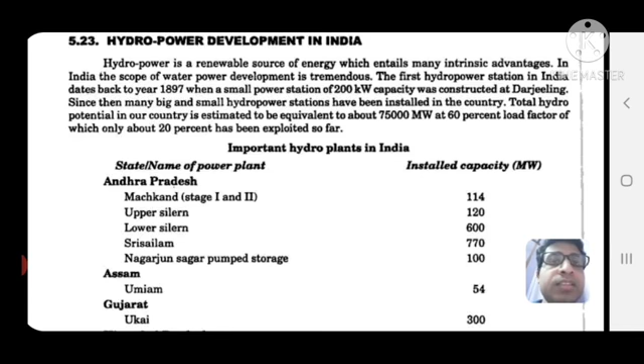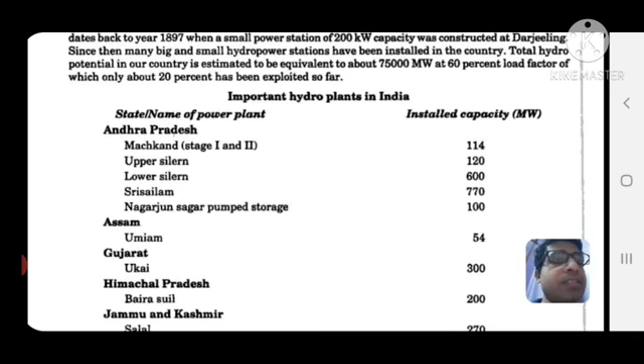The first hydropower station in India dates back to 1897, when a small power station of 200 kilowatt capacity was constructed at Darjeeling. Since then, many big and small hydropower stations have been installed in the country. Total hydro potential in our country is estimated to be equivalent to about 75,000 megawatt at 60% load factor, of which only about 20% has been exploited so far.

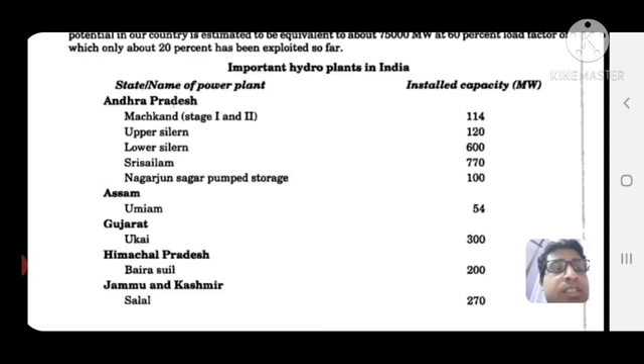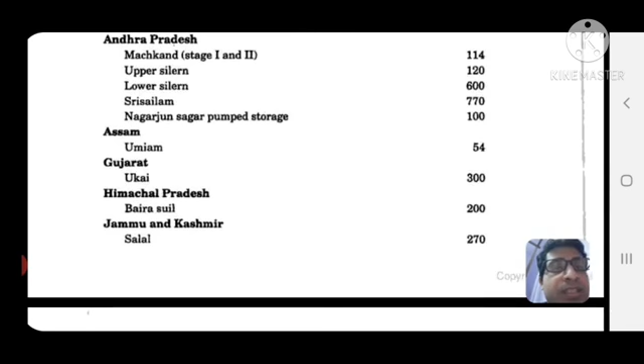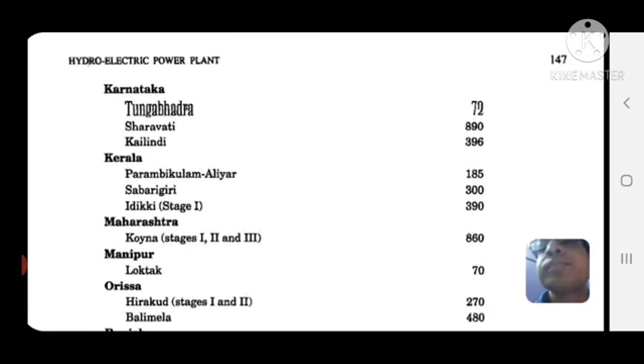State name and power plant installed capacity: Andhra Pradesh, Machkund and Upper Sileru, install capacity 114-120. Assam 54. Gujarat, Ukai, 300. Himachal Pradesh, Bairasiul, 200. Jammu and Kashmir, 270. Karnataka, Tungabhadra, 72. Manipur 70, Odisha 270, and Tamil Nadu, Uttar Pradesh, Rajasthan, one by one.

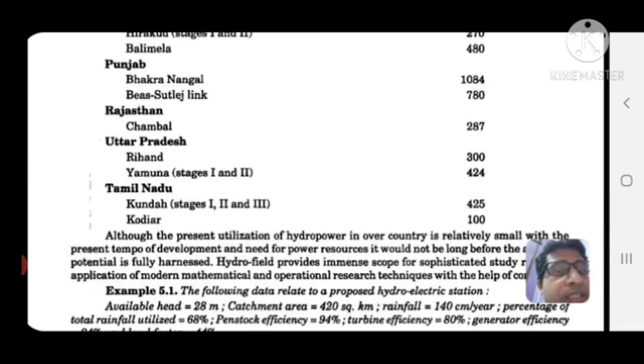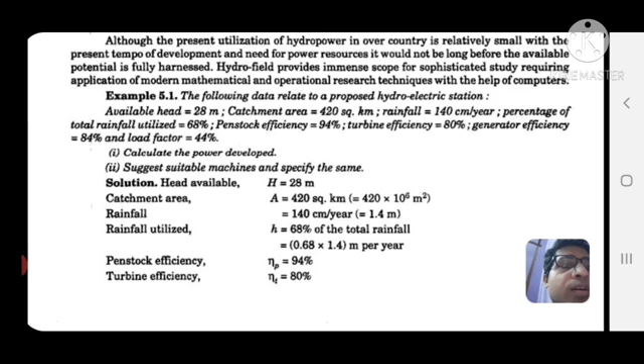Although the present utilization of hydropower in our country is relatively small, with the present tempo of development and need for power resources, it would not be long before the available potential is fully harnessed. Hydrofield provides immense scope for sophisticated study requiring application of modern mathematical and operational research techniques with the help of computers.

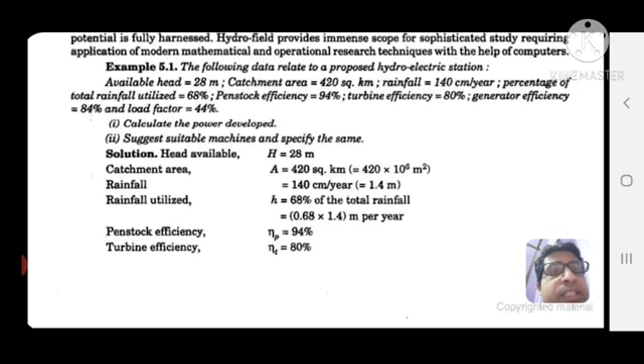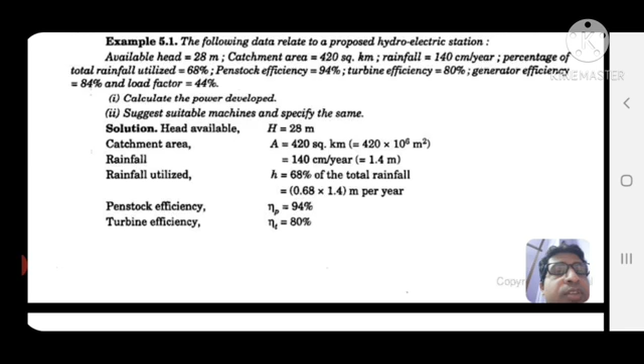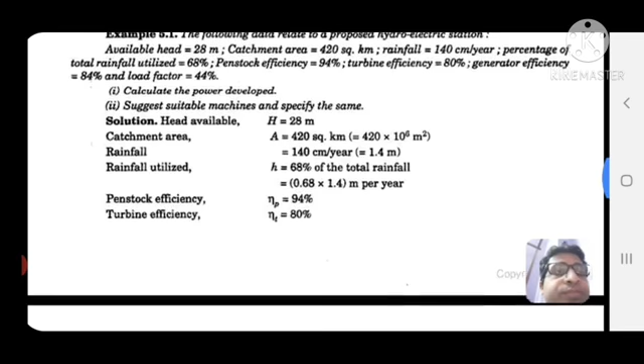The following data relate to a proposed hydroelectric station. Available head H equal to 28 meter. Catchment area 420 square kilometer. Rainfall 140 centimeter per year. Percentage of total rainfall utilized 68%. Penstock efficiency 94%. Turbine efficiency 80%. Generator efficiency 84% and load factor equal to 44%. Calculate the power developed. Suggest suitable machines and specify the same.

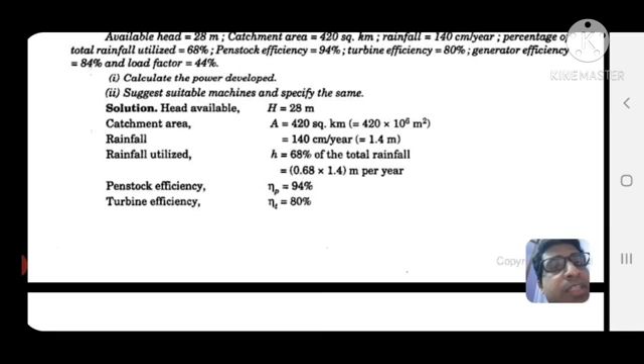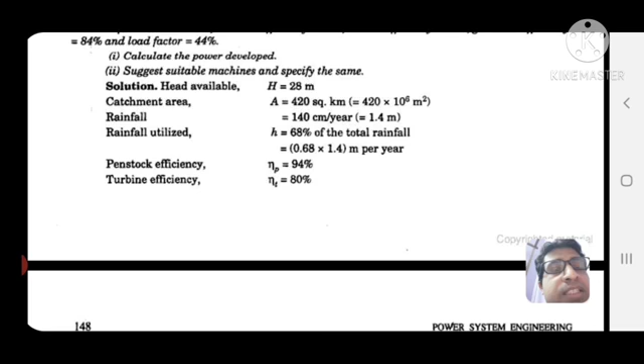Head available H equal to 28 meter. Catchment area A equal to 420 square kilometer. Rainfall 140 centimeter per year. Rainfall utilized 68% of the total rainfall, that is equal to 0.68 into 1.4 meter per year. Penstock efficiency eta P equal to 94%. Turbine efficiency 80%. Generator efficiency eta G equal to 84% and load factor equal to 44%.

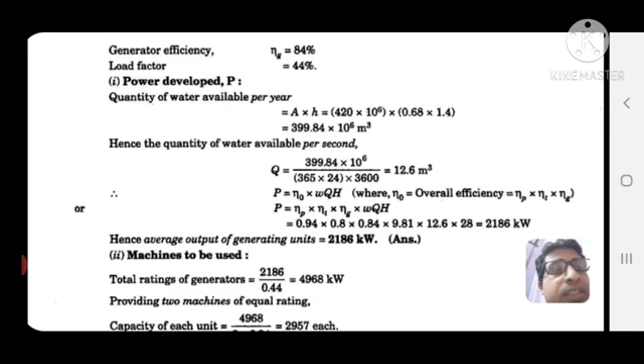Power developed: quantity of water available per year equals A into H, so 420 into 10^6 into 0.68 into 1.4, equals 399.84 into 10^6 meter cube. Hence quantity of water available per second Q equals 399.84 into 10^6 divided by 365 into 24 into 3600, equal to 12.6 meter cube per second.

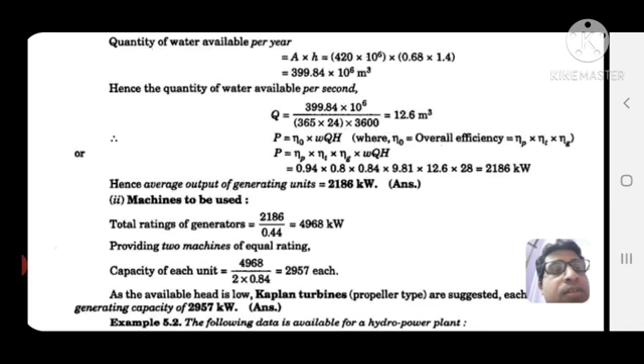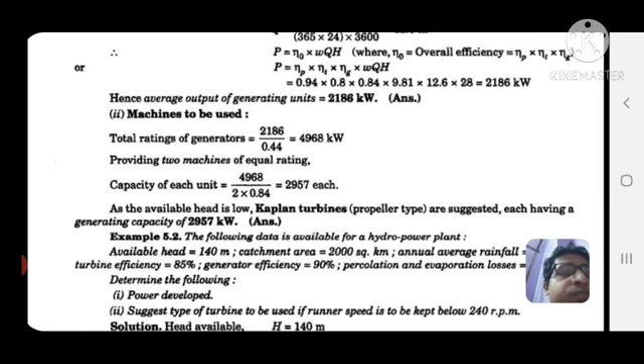So P equal to eta 0 into WQH, where eta 0 is the overall efficiency, that is eta P, eta turbine and eta G. P equals eta P, eta turbine, eta G into WQH, that is equal to 0.94 into 0.8 into 0.84 into 9.81, 12.6 into 28.

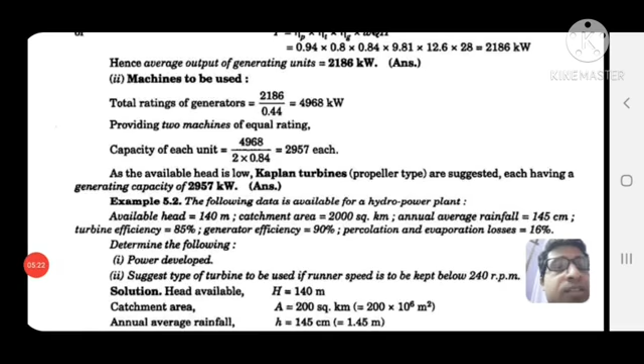Machines to be used. Total rating of generator equal to 2186 divided by 0.44. After calculating, you get 4968 kilowatt.

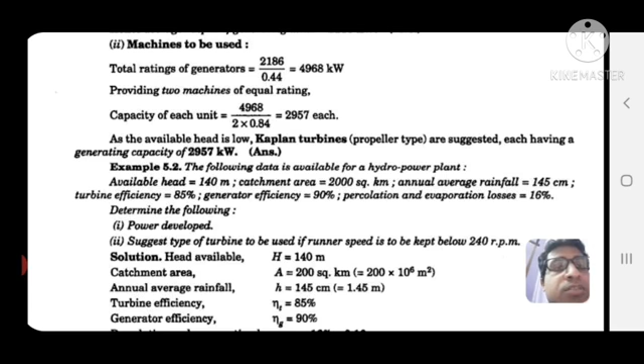Providing two machines of equal rating, capacity of each unit equal to 4968 divided by 2 into 0.84, that is equal to 2957 each. As the available head is low, Kaplan turbines are suggested, each having this generating capacity.

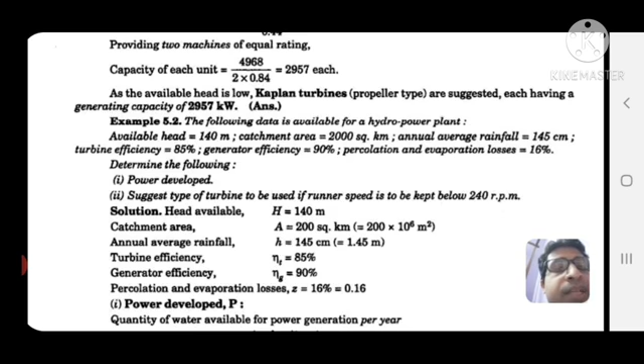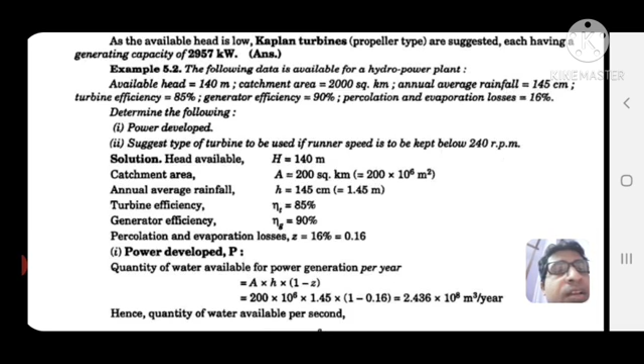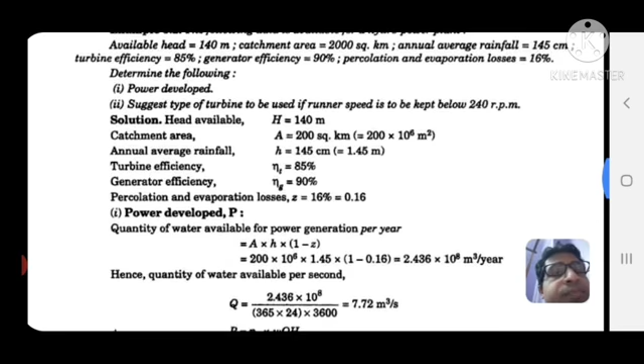The following data is available for a hydropower plant: available head equal to 140 meter, catchment area equal to 2000 square kilometer, annual average rainfall equal to 145 centimeter, turbine efficiency equal to 85%, generator efficiency equal to 90%, percolation and evaporation losses equal to 16%. Determine the power developed, and suggest the type of turbine to be used if runner speed is to be kept below 240 rpm.

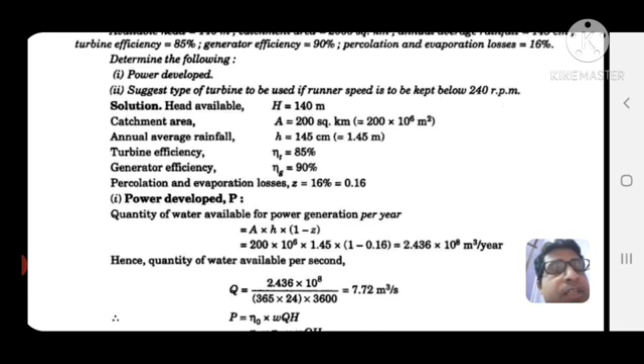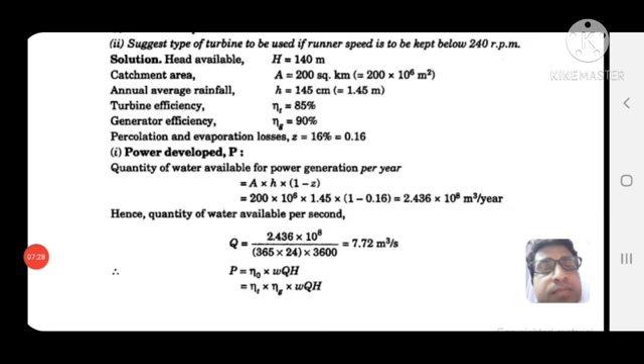Head available H equal to 140 meter. Catchment area A equal to 200 square kilometer, that is equal to 200 into 10^6 meter square. Annual average rainfall H equal to 145 centimeter, that is equal to 1.45 meter. Turbine efficiency equal to 85%. Eta G equal to 90%.

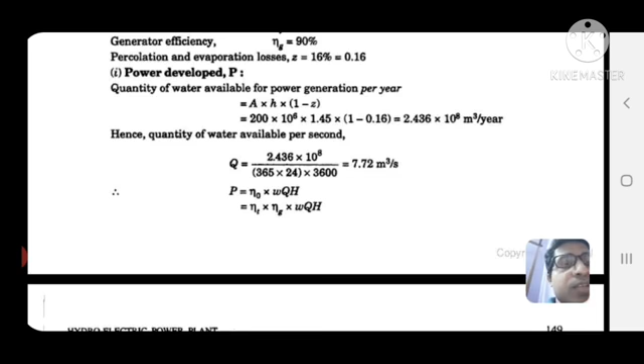Percolation and evaporation losses. Power developed: quantity P, A into H into 1 minus Z, so 200 into 10^6 into 1.45 into 1 minus 0.16, equal to 2.436 into 10^8 meter cube per year.

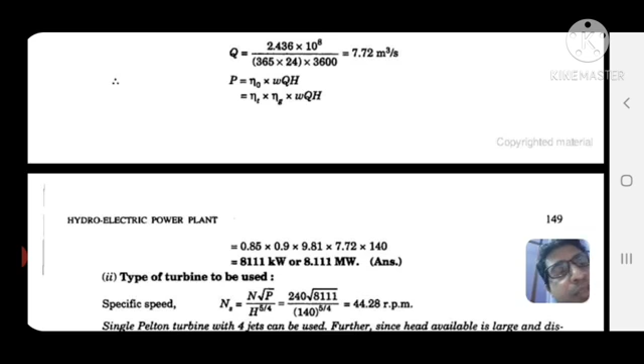So Q is equal to 2.436 into 10^8 divided by 365 into 24 into 3600, that is equal to 7.72 meter cube per second. That is the discharge, 7.72 meter cube per second.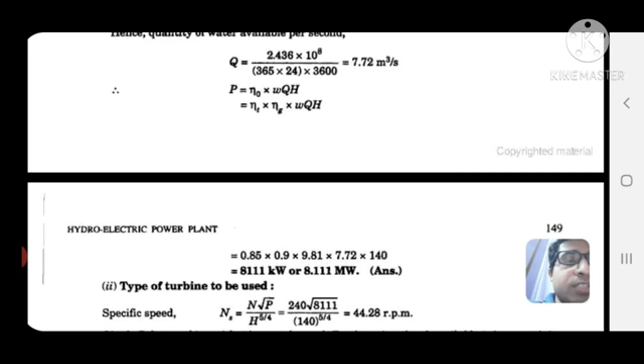Now P equal to eta 0 WQH, actually eta T and eta G into WQH, so 0.85 into 0.9 into 9.81 into 7.72 into 140, that is equal to 8111 kilowatt or 8.111 megawatt.

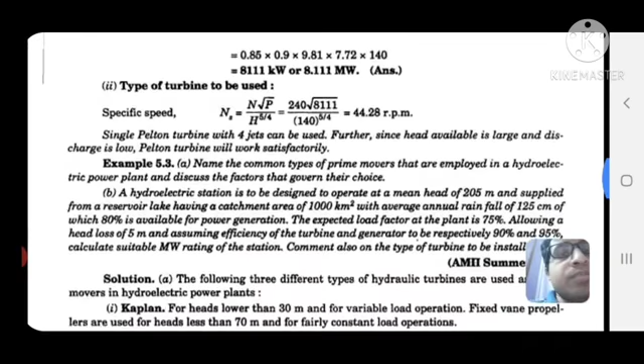Type of turbine to be used: specific speed ns equal to N root P over H to the power 5 by 4, so 240 root over 8111 divided by 140 to the power 5 by 4, that is equal to 44.28 rpm.

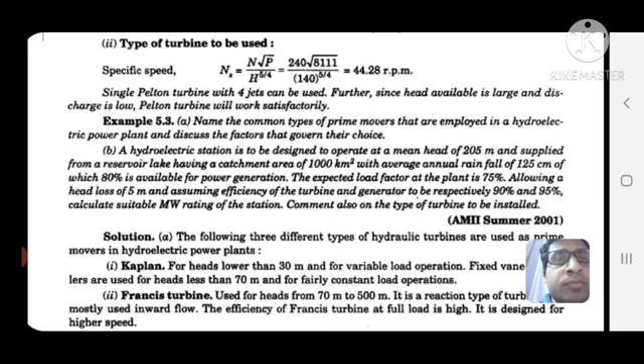Single Pelton turbine with 4 jets can be used. Further, since head available is large and discharge is low, Pelton turbine will work satisfactorily.

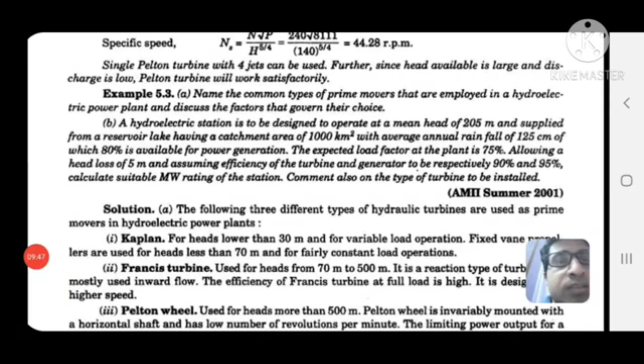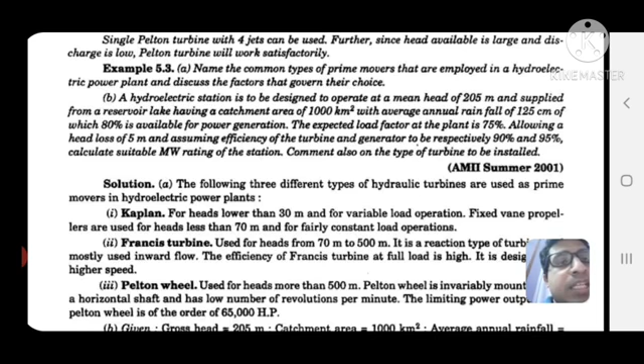Now another problem. Name the common types of prime mover employed in a hydroelectric power plant and discuss the factors that govern their choice. A hydroelectric station is to be designed to operate at a mean head of 205 meter and supplied from a reservoir lake having a catchment area of 1000 square kilometer.

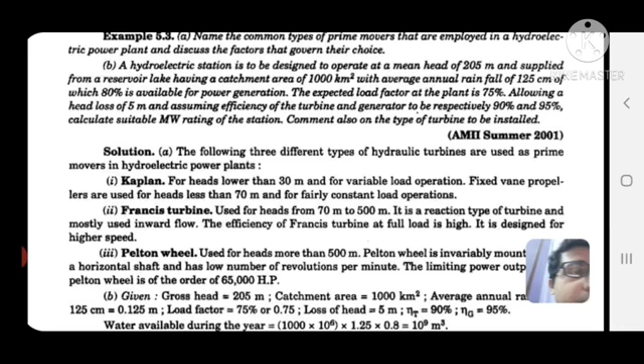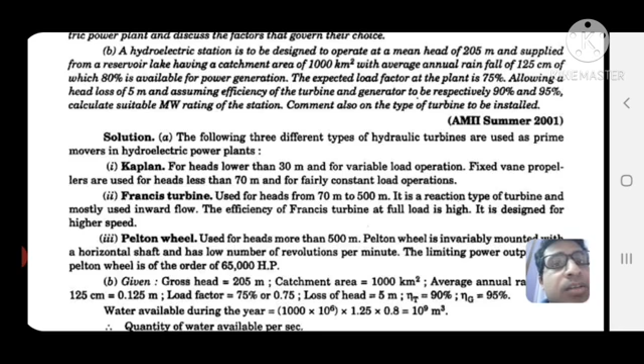With annual average annual rainfall of 125 cm, of which 80% is available for power generation, the expected load factor at the plant is 75%, allowing a head loss of 5 meter and assuming efficiency of the turbine and generator to be respectively 90% and 95%. Calculate suitable megawatt rating of the station. Comment also on the type of the turbine to be installed.

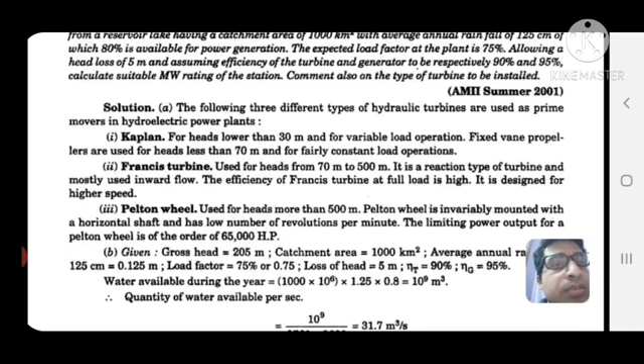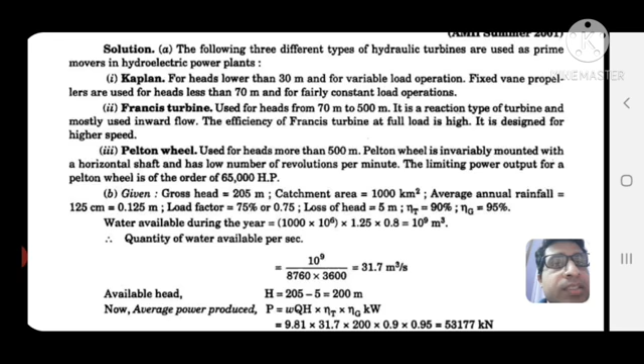The following three different types of hydraulic turbine are used as a prime mover in hydroelectric power plant. Kaplan for heads lower than 30 meter and for variable load operation, fixed vane propellers are used for heads less than 70 meter. And for fairly constant load operation, Francis turbine used for head from 70 to 500 meter. It is a reaction type turbine and mostly used inward flow.

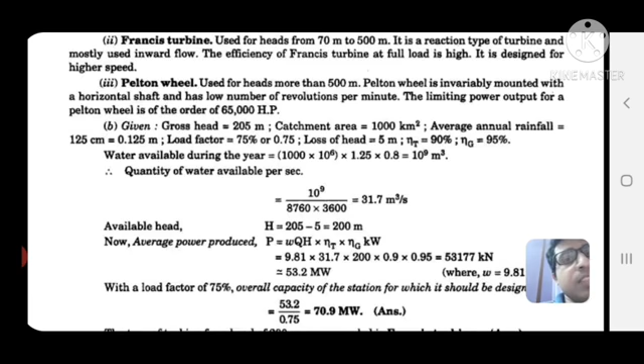The efficiency of Francis turbine at full load is high. It is designed for higher speed. Pelton wheel used for heads more than 500 meter. Pelton wheel is invariably mounted with a horizontal shaft and has low number of revolutions per minute. The limiting power output for a Pelton wheel is of the order of 65,000 HP.

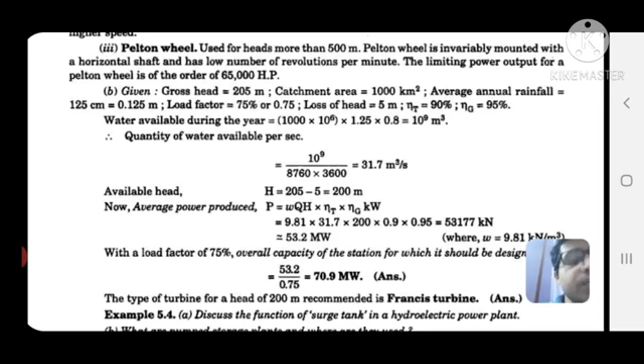Gross head 205 meter. Catchment area 1000 km square. Average annual rainfall 125 cm or 0.125 meter. Load factor 75% or 0.75. Loss of head equal to 5 meter. Eta T equal to 90%. Eta G equal to 95%.

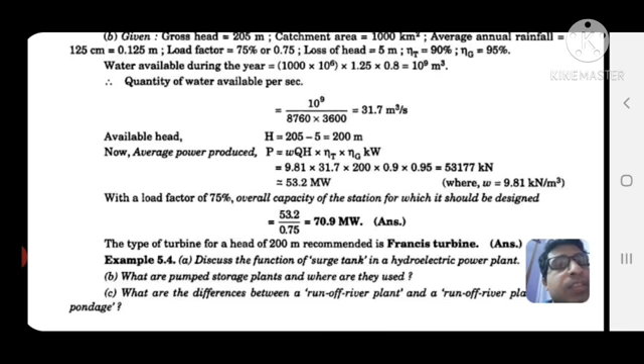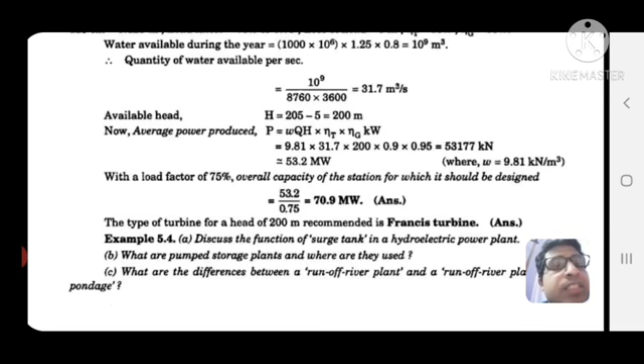Water available during the year: 1000 into 10 to the power 6 into 1.25 into 0.8, equals 10 to the power 9 meter cube. Quantity of water available per second: 10 to the power 9 divided by 8760 into 3600, that is equal to 31.7 meter cube per second.

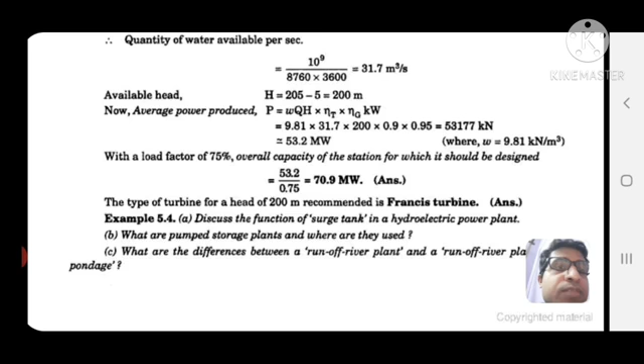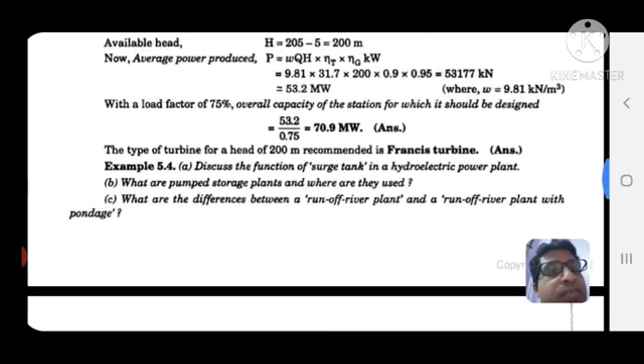Average power produced P equal to W Q H eta T eta G kilowatt. So 9.81 into 31.7 into 200 into 0.9 into 0.95, that is equal to 53177 kilonewton, so 53.2 megawatt. With a load factor of 75%, overall capacity of the station for which it should be designed is 53.2 divided by 0.75, that is equal to 70.9 megawatt.

So the type of turbine for a head of 200 recommended is Francis turbine.

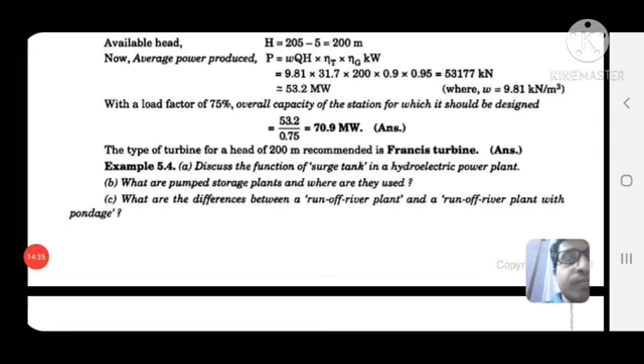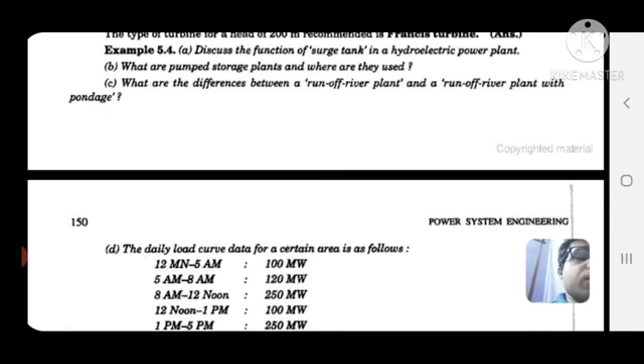Discuss the functions of surge tank in a hydroelectric power plant. What are the pump storage plants and where are they used? What are the differences between the runoff river plant and runoff river plant with pondage?

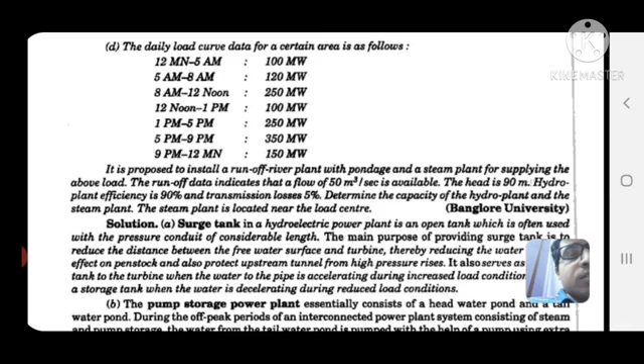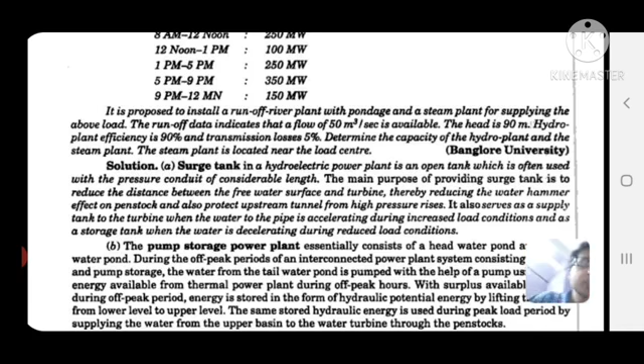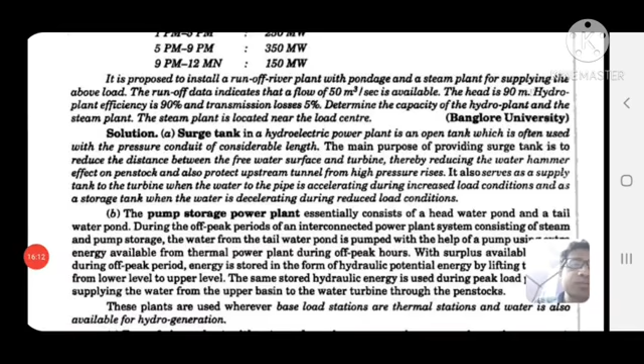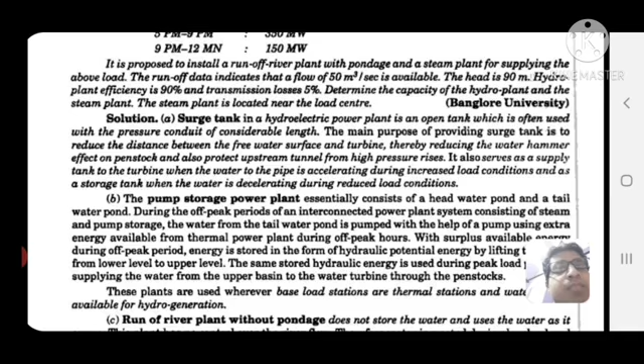It is proposed to install a runoff river plant with pondage and a steam plant supplying the above load. The runoff data indicates that a flow of 50 meter cube per second is available. The head is 90 meter. Hydro plant efficiency is 90% and transmission losses 5%. Determine the capacity of the hydro plant and the steam plant. The steam plant is located near the load center.

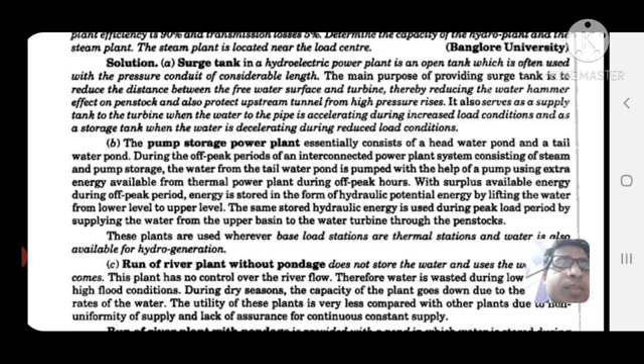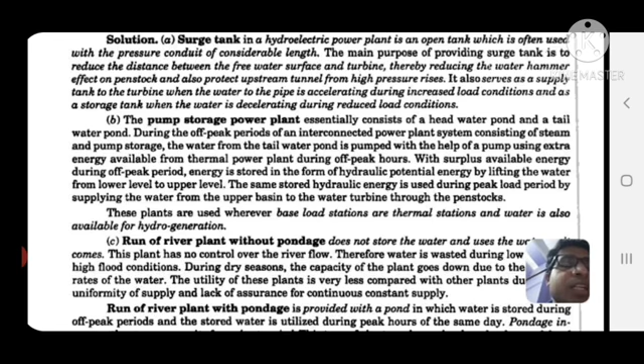Surge tank in a hydroelectric power plant is an open tank which is often used with the pressure conduit of considerable length. The main purpose of providing a surge tank is to reduce the distance between the free water surface and turbine, thereby reducing the water hammer effect on penstock and also protecting the upstream tunnel from high pressure rise. It also serves as a supply tank to the turbine when water in the pipe is accelerating during increased load condition, and as a storage tank when the water is decelerating during reduced load condition.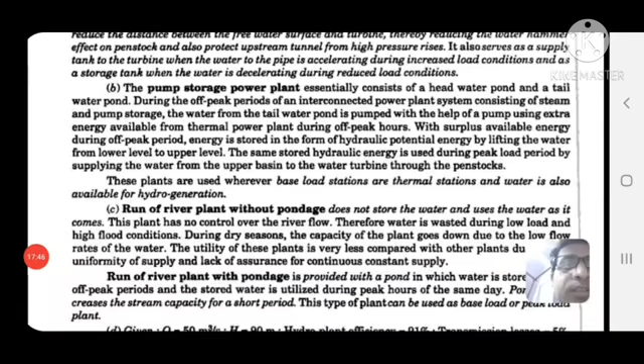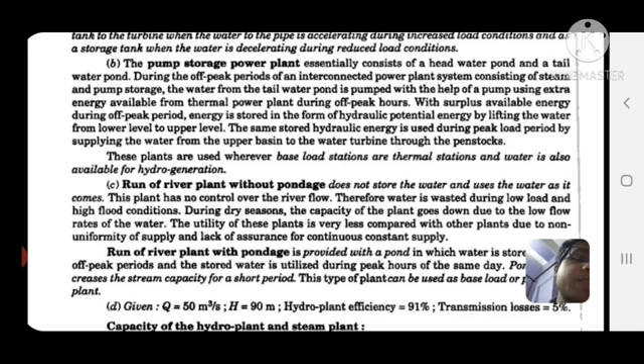The pump storage power plant essentially consists of a head water pond and tail water pond. During the off-peak periods of an interconnected power plant system consisting of steam and pump storage, the water from the tailwater pond is pumped with the help of a pump using extra energy available from the thermal power plant.

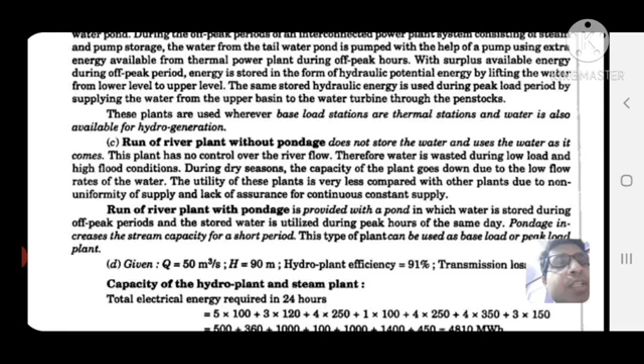During off-peak hours, with surplus available energy, energy is stored in the form of hydraulic potential energy by lifting the water from lower level to upper level. The same stored hydraulic energy is used during peak load period by supplying the water from the upper basin to the water turbine through the penstock.

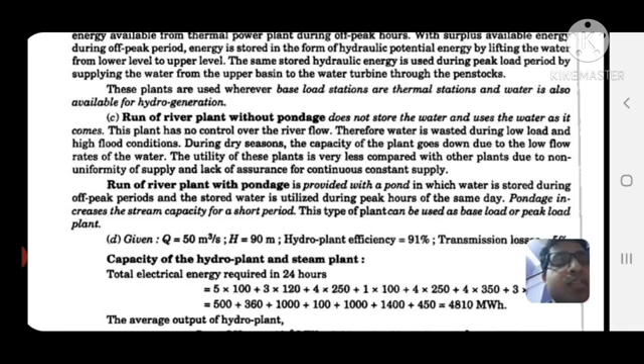These plants are used wherever there is a base load station or thermal station and water is also available for hydro generation.

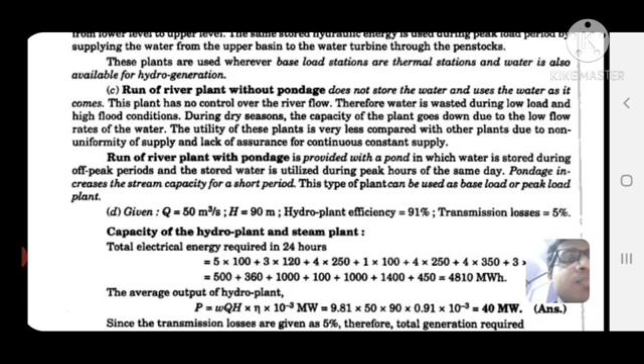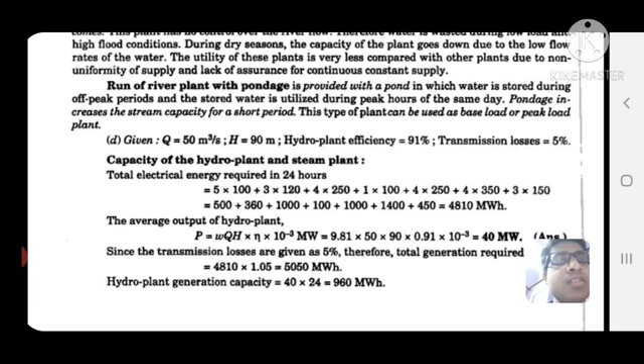Run of river plant without pondage does not store the water and uses the water as it comes. This plant has no control over the river flow. Therefore, water is wasted during low load and high flood conditions. During dry season, the capacity of the plant goes down due to low flow rates of the water. The utility of these plants is very less compared with other plants due to non-uniformity of supply and lack of assurance for continuous constant supply.